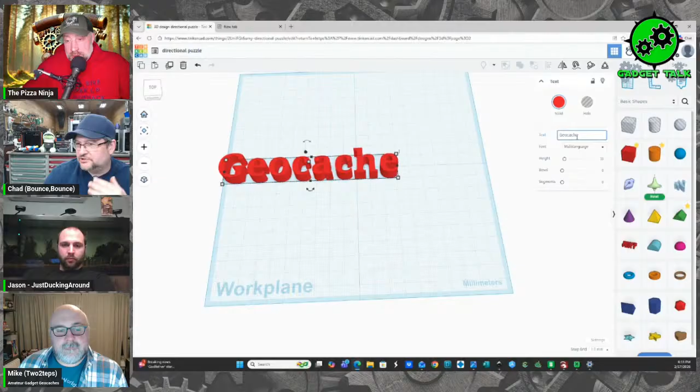One thing about Tinkercad: you have your basic shapes here. This is a solid shape, and this is a negative space shape. Then here are some other designs. If you want to add text, you can click on text and edit it right here, so you can add that to your design really easy.

I'll delete that. So right now up here it shows different basic shapes, and you can go to more advanced ones where there's actually creatures and everything, fun and games, electronics. If you go to electronics, there's different parts there that you can use.

They changed this up a little bit since I've used it last. These are the different Arduino boards or different boards to use, and there's also a sim lab. If you're trying to do an Arduino circuit, you can... oh wait, this isn't it. Is that still in the electronics one? You can add your boards and actually do... oh, you know what, that's on a different design up here.

And Tinkercad is fully web-based too, right? Yes it is. So you go up to circuits here on the top, and you can design circuits and actually test the circuits that way.

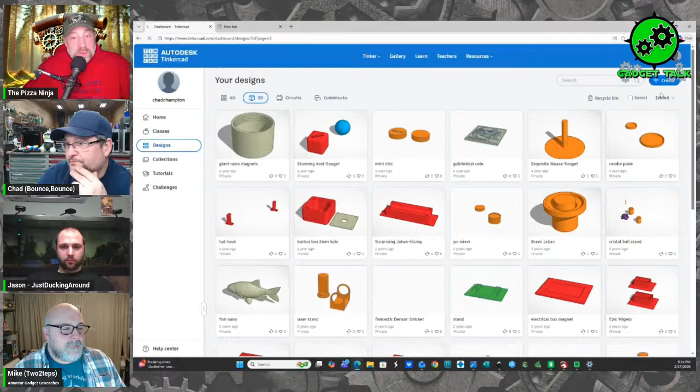I'll go back to my last thing I was working on. Actually, maybe I'll just open up a new design and start new. Really simple if you want to do a shape or a square box—here's your box, and we're talking about millimeters. Here you can adjust your size. So this right now is 60 by 60, and you can adjust this however you want.

And here is the height of it, so you can adjust this however you want to make a square. You can adjust the radius here if you want to, and the steps, the lengths, everything right here you can adjust. If you want to add a negative hole in it, you go to negative part. Now you can change this to a solid part here, or change this to a negative part as well if you want to.

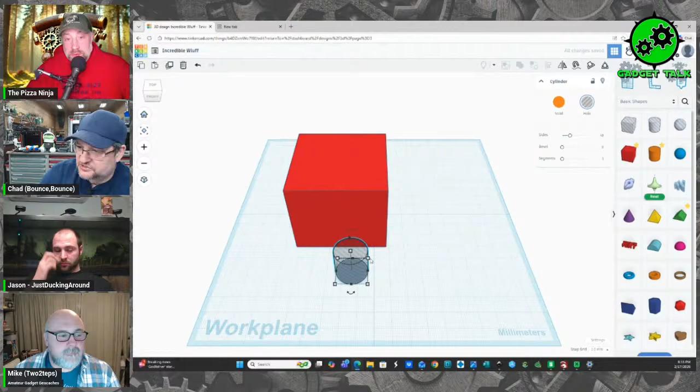But super simple—so when I make certain things, I'll do a negative part to fit in it, like the directional arrows. We'll do one here real quick to show you, and I'll try to be quick so we're not taking up too much time. This is 60 by 60, so I'm going to make this probably 50 by 50. If anybody has any questions, let me know.

Hopefully this is what we were hoping to explain a little bit.

As we're doing that, we got a few questions in the chat. One of them is from Chippy's Woodshop, who asked, do you usually design in metric? I always design in metric.

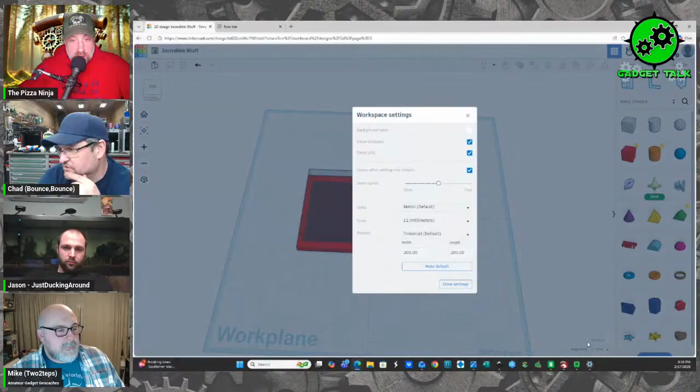I think Tinkercad actually has a setting too, where if you go into settings, you can change it from metric to imperial as well. Yeah, so if you go down to the bottom here, you can change from metric to imperial and to bricks, like Lego bricks type thing, or imperial, and you can also change it in settings. You see all these little squares here at the bottom—if I want to go over a little bit, oh, I got to click on it. I can adjust it over a tiny bit and it's going to go one square. You can actually change that all the way down to 0.1, and it barely moves if you're trying to move it, so you can adjust it that way.

So these two designs right now are the same height. If I put this inside here and group it together, it's going to show a negative space.

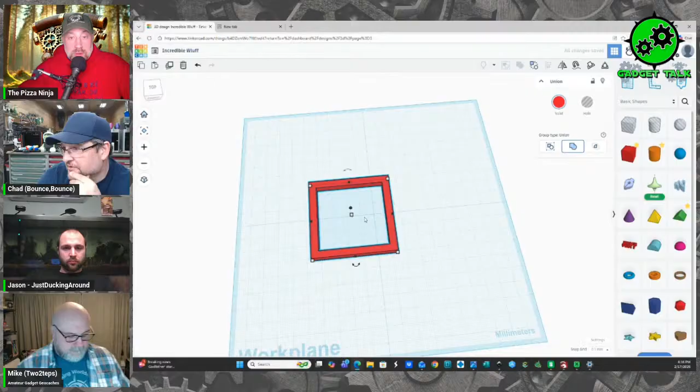But for my magic blocks or the directional arrow, I actually want a backing on this, a lower part. Let me ungroup it real quick. If you look at the arrow here on top, you can click on it and drag it up a little bit.

I'm going to just go to 1 millimeter. Right now this block here I have set for 5 millimeters thick, and this one here is sitting at 1 millimeter off the bottom, 2 millimeters and 3. So we're going to go 2 millimeters off the bottom.

If I want to center all this, we can go up here to the alignment area and align it center here and here, and it'll center it. Now if we group it, it gives you a bottom piece to it.

So that's how you can actually insert like a puzzle or anything into your shape.

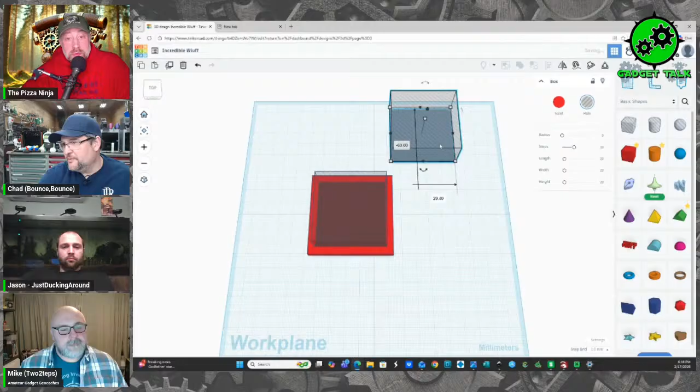I'm going to ungroup this real quick because I'm going to copy my negative space, since that's going to be my insert. Now I'll regroup this.

Again, I'm not a professional at this. I'm going to make this solid. Now this is going to fit inside here when I print it.

I actually am going to take it down a tiny bit in height or width, just because it's going to be so tight. It'll have a hard time fitting in, especially depending on your smash on your printer. If you have a little more smash than you need, it'll be harder to put it on there. So I'll go 49.5.

A lot of times when I'm doing this, I'll print it and it's a little too tight still, or a little too loose. So that'll be my space there. I'm going to make this 5 millimeters thick, and so this is going to be my block.

So on the directional arrows, I think I have a pair right back here.

Hey Chad, as you're doing that, we got a question from dsmavis: what is smash?

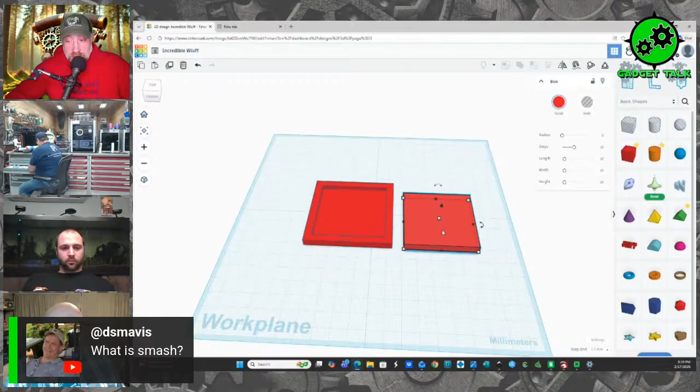Oh, that's a good question, that's a great question. So your 3D printer, when it's printing with your filament, the nozzle is going to push down on the bed, and instead of it being exactly round, especially for your first layer, it's actually going to smash a little bit to make it stick to the bed.

And if you have it smashed too much, it's going to actually have a little edge sticking out of it. Can one of you, maybe Jason or Mike, explain that a little bit better?

Yeah, so when you're 3D printing, it's almost like you're squeezing a piping bag of icing out. When you push that down, there's always going to be a little bit of squish in that plastic goo that comes out of the printer, so that can deform the bottom a little and give you not a true shape.

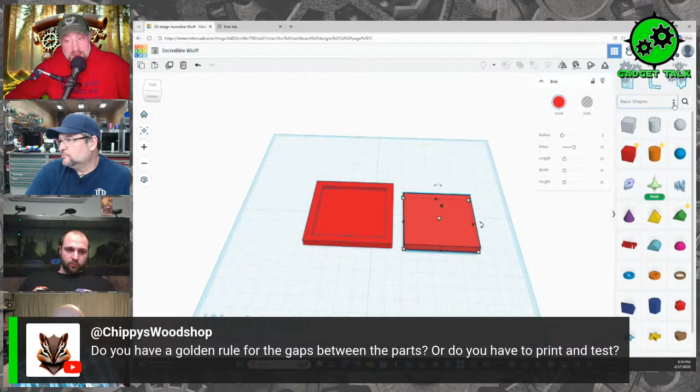You can also think of it kind of like making allowances for tolerance. Someone asked about a golden rule for gaps—I think a lot of times that plays into how precise your nozzle is. So if I have a 0.4 nozzle on my X1, I usually give myself about a 0.2 millimeter leeway for what I design versus what I'll get out of the printer.

But if I had a finer nozzle, I could dial that in even more, or if I had a crazy high-end printer, I could almost eliminate it. So there's always a little bit of tolerance you have to play with in your models versus what you have on the digital screen versus what comes out on your printer.

And you can overcome that smash by doing a fillet on the bottom too, and that kind of helps with your tolerancing as well.

So they've changed this Tinkercad up a little bit since I've used it last. Yeah, I was noticing like the other day when I was showing it to somebody, they've done a lot of updates recently. I think the software I use also just got an update. I opened it the other day to practice tonight's demonstration and I'm like, these are new menus. What did they do to me?

I haven't seen some of these. So I'm looking for the arrows, which used to be here. If you right click at the more shapes option, I can't remember if that's how it works, because in the menu you go down to the bottom too, and I can't remember if the arrows are in there. But if you select one of those options and go down to more shapes, do you see the button at the bottom? Oh, there we go, okay. It's interesting because I thought the same thing when I was checking it out last. I was like, where'd everything go? It's like, oh, you have to expand it with that more shapes or that more button to find more. Oh, thanks John.

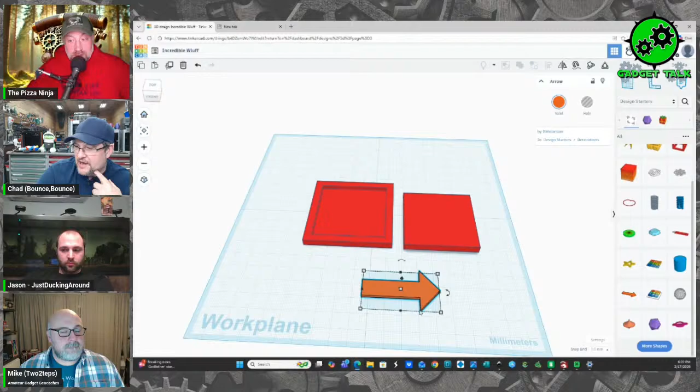So I didn't find the sample, I know I have it somewhere close to me. But this is the one where you get 5 different arrows and they only go in a certain direction. So the arrow I have is recessed into this block. Now again, this is only so thick, and I'm going to bring that up and make this a negative space on the arrow. Put one more, and then I'll make the arrow negative, because when I go to print it, I'll do it in a different color. I think I'll change the size of it to...

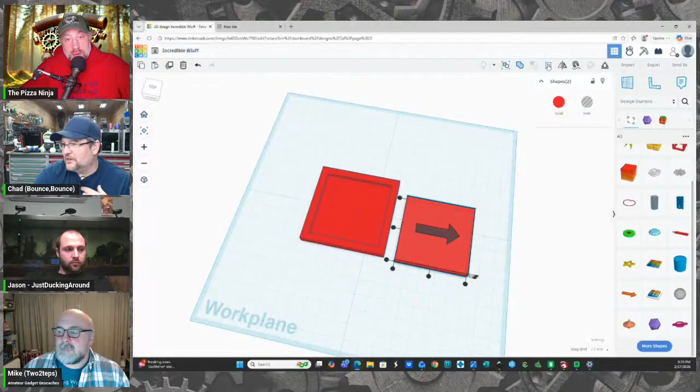Oops, that was the degree. So, there's other people who do this way faster and do it differently, but this is the way that I do it. So I'm teaching you my bad habits. And then again, I'm going to center all this here. I'm going to go up to the alignment tool, center it in the middle there and here. And then you can also center it, if you look this way, even with the top if you want to.

And then if you group it, you can... but you see how that brought up the block? So when I go to print it, it's going to be in the air. So I'm going to leave it down on the bottom. But I'm going to group this.

They've changed the grouping symbols too. Oh yeah, definitely the interface. I know Chrysler King was saying he uses it for some designs as well, and he thinks it's so much easier and smoother than it used to be. But yeah, it definitely takes some adjustments for sure.

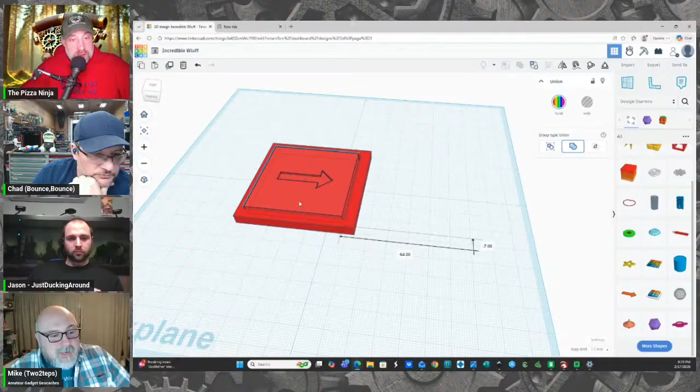I was gonna say, I think one thing with modeling too is anyone who tries this is gonna find that there's a lot of different ways to get the exact same outcome. So there's not necessarily a right or a wrong way. There are just better or more efficient ways, but the outcomes can still be the same, even if you took an entirely different road to get there.

Okay, now I'm learning here with everybody. So now let me see if I can find that here real quick. I know I have it fairly close.

Why do you guys like designing in millimeters compared to inches? For me, I think it's just a little more precise and easier to scale. If I want to go, oh how many centimeters is that, you add a 0, and it's easier to go up and down. You're using regular numbers, not fractions. I will admit, I use digital calipers, kind of like a poor man's conversion chart. So I'll measure an inch out, then hit the conversion and flip it to millimeters to get the conversion, or vice versa.

And I think for me, it's interesting because if I open Tinkercad, I don't know if it's like a graphic design type of feel, I'll go into the settings and set the work plane to be my build plate size. And for some reason, I always think in inches for that one. So I just find myself almost out of gut, changing it to imperial right away. Yeah, I do everything in inches, I've never considered doing it in millimeters. Fractions will kill me if I try and do it. But they're so ingrained in my head now that I just know them.

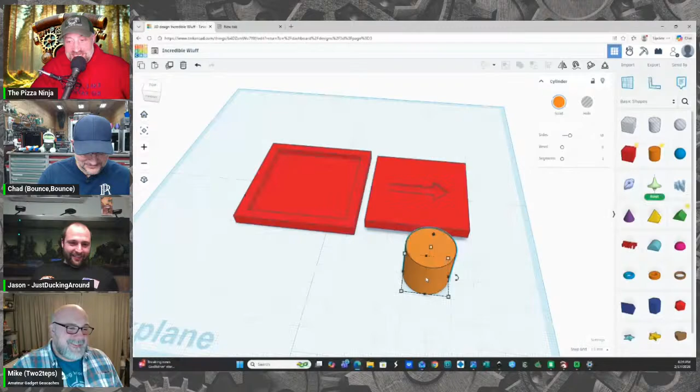That's great. So this is what they look like. I don't know if we can make my screen here bigger, John. So this is the design that I came up with, the arrow. If you look at the blocks here, there's several different blocks, but they don't all fit in the same spot.

Let me take down the arrow. So the arrows are in different directions, and the ears on them are different. Oh, that one's gone. If you look at the bottom, it matches. So you have to find the right arrow.

This is for a directional lock, by the way. You have to find the right direction of the arrow. So if you had like an ammo can insert, this is a pretty cool one to use. Seen this before, right? Love that one.

My plan was to actually integrate these squares into one of these for a cache. Then it would give your arrows the directions you need to go for your directional lock, and you just got to find it. We need to add those ears on here, and then they need to be adjusted several times for the lock so they don't fit evenly.

This is a little bit different, and I can show later. I don't want to take up everybody else's time. He did the directional one, but with the lengths, so you got everything the same height.

Oh, that's right, I got to share these on my Thingiverse or on Bambu's thing. Now that Mike mentioned that you actually get stuff for that, I'm like, well shoot. Get your free fill, I can get a new printer. It's about time. There you go. That would be sweet, it's been a couple months.

Anyway, I am going to add some ears to this. Let's see, how thick is this one? Five, I'm going to make this five.

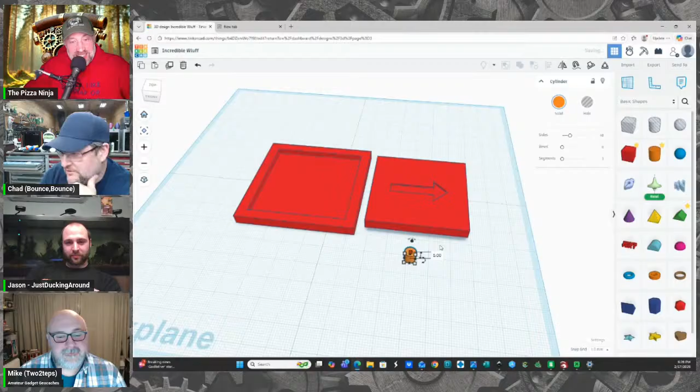And the way I'm going to do this is a little bit different. Oh, that's up in the air. There we go, I took it back down to zero if you didn't see that. Oops, and you don't have to use squares, you can use triangles.

Going to make a couple copies of it. So that's just Control C and V for copy and paste. I'm just going to add these around the arrows here, around this square in different places. Hopefully get them centered a little bit.

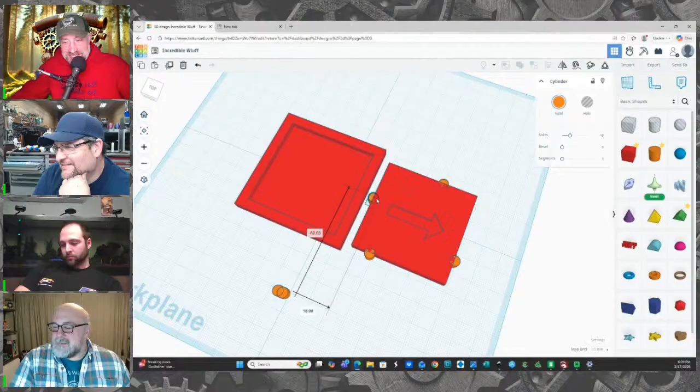In chat, Seaback Tribe says those arrows look very, very familiar, like I just saw them about a month or two ago. LOL. Yes, the other ones that I showed that Chad put out, I actually have in my Cache Odyssey Washington cache now.

If you could do this here, put it around this way. Let me move that real quick, and then you can group this, and then you'll just need to adjust every time.

I'm going to copy and paste that real quick, group it, and then make it a negative, and then center it in here. I need to go back up to my 50 though. Oh, it's 55 because of that. Let me change this, sorry, I need to make this the same size as that negative spot.

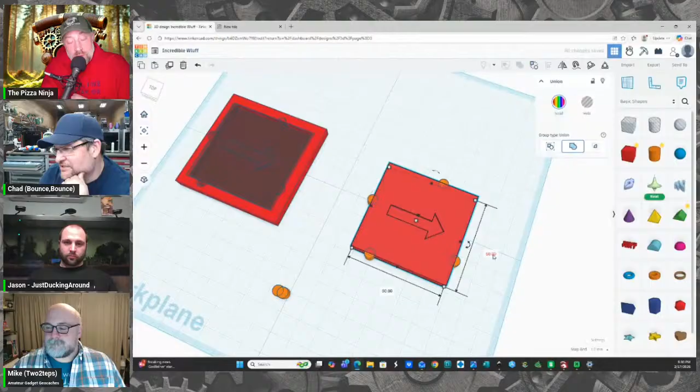This is why watching me, it takes me time. Well, so I mean, okay. I think this is great because it just walks people through that thought process, and a lot of it is experimentation, just sitting here and messing around. I mean, yeah, this is a good idea, at least for me.

So if I take this, put this in here, and I'm going to go up here to the alignment tool real quick, and I'll line it. And then I'm going to go ahead, I think this is on the bottom though. Yep, so if I look down underneath, I can see it sticking through. And I think I left 2 millimeters in between.

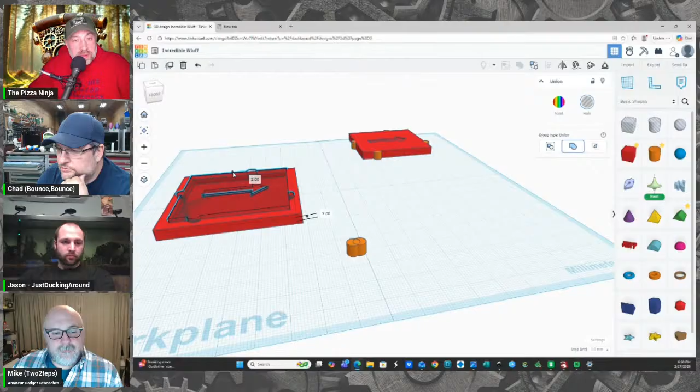So I'm going to go up 2 millimeters and make sure my alignment is still good, which they're grayed out, so they are. And if I group it, then that's going to give me the exact space for this to sit into. And then that's the bottom for number one.

I should have copied it without these arrows in it, but that's easy enough to change. I can ungroup it and move this. Whoops, just grab that middle part.

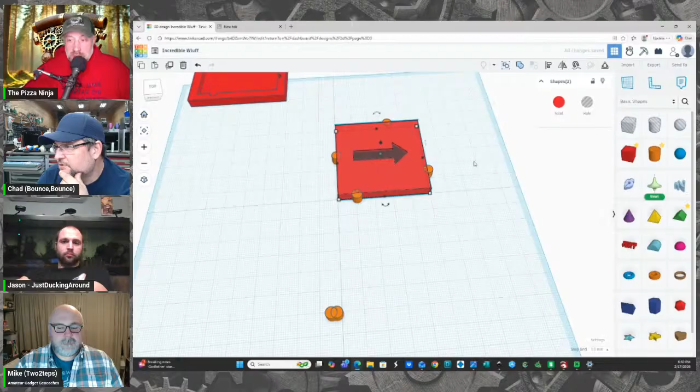I can take the arrow here and rotate it, so I can go 90 degrees if I want to. You don't have to do that, because whenever you put your little block down, unless you're making it negative space into this so I don't have to glue this plastic on there, you can just turn this to whatever direction you want it to be.

So if you do what I just did several times, export it as STL, then you could print it and that works, like that. Chad, do you want to walk people through the exporting on this one?

Because I mean, with Tinkercad it's just so friendly to do. Sure, so all you have to do is go up here to export, and then STL.

And then there it is right there, you can click on it. Oops, I'm on my screen. It might take a minute, I got a lot of windows open. But this will open up in the Bambu Studio.

And then you can make it whatever size you want. I was just messing around with whatever size this is on here, but you can change it. Instead of having half circles on there, you can do a triangle, you can do a square, you can do whatever you want with it. But the circles seem to work easiest for me.

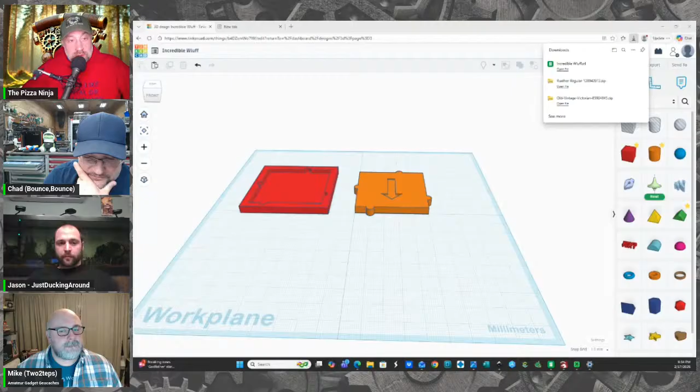So you just export as STL or save to your desktop as the STL, and then open it up. I think I got a bunch of windows open already for Bambu, that might take a while. But that's pretty much it.

Well, very cool. Hey Chad, we got a couple questions. So Chippy's Woodshop asks, is it possible to do parametric design in Tinkercad?

What's a parametric design? I did a little homework, I did not know this before, but parametric design is a design that is based off of set parameters. Tinkercad is a direct design with solid geometry, so it's taking shapes and putting those shapes together in different ways and sizes to build your final design, versus a parametric one, which would be drawing something in 2D and then extruding it and modifying that object using specific measurements based on the shape itself.

Like instead of just dropping a hole somewhere, you'd say okay, 2 millimeters from the left, 2 millimeters from the top, place a hole that's 1 millimeter wide in this spot. And then if you were to change any of those parameters, it would update the model to reflect that change. So, right, my crash course.

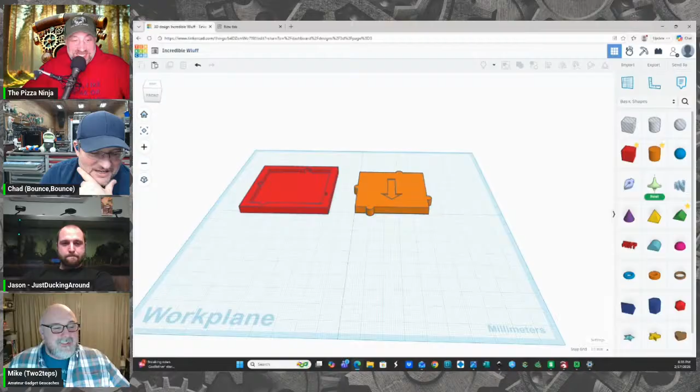That's why I wanted to meet this morning, that's what I wanted Mike and Jason on, because I think their programs are more tuned to doing that. Yeah, Mike can do Tinkercad. Yeah, and I think Tinkercad's a great way for people to get started.

And I know Chippy's Woodshop asked another question: can you design something complex in Tinkercad from scratch? Yeah, it depends on what you mean by complex. I've designed everything in Tinkercad that I do, but I guess it depends on how complex he's talking. I think it would be easier to do in one of the other programs.

That's something I think we're going to see as we look at my software and what Jason uses. The software gets more complex, but really it's just taking things that happen more frequently and making them a little easier. So I think you can absolutely do something complicated in Tinkercad. It just might take longer and take more patience from you than doing it in a more advanced software higher up the hierarchy.

Chad Bell on the Move says my daughter says Chad needs more 3D printers so that he has something to fill up his giant warehouse.

Chad, I have two sitting over in my pile over there. They're there in case, and I have two other ones upstairs. So how many are you up to in your shop? Not that many, I don't know how many I have back here. Five. Okay, nine. So I keep five behind me running, you can't see the very far end ones there. But then I have the Prusa XL, the Bambu H2D, two X1 Carbons, and a P2S. Then I have two Prusa MK3Ss, and then I have two, what's that brand I hate? Creality. It's a big format printer, I forget, but it's a piece of junk. Don't buy it, I don't want to advertise for them.

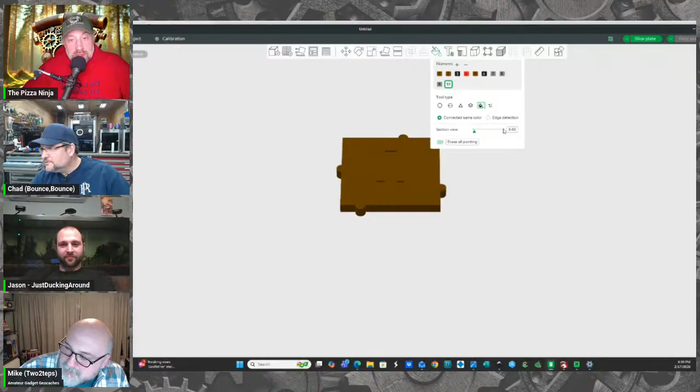Oh, see this has been updated too. Hit the edge detection on the right, below the paint bucket. Oh, there we go, sorry, thank you guys. Then I'm going to paint that arrow white. I don't know if I've ever had to click on that before, maybe I did last time. It caught me too. If you do fillets or anything in your model, it doesn't have edges, so it won't detect them. Oh, okay. So now that's white on there, and when I go to print that, it will print that arrow white or whatever color you want to use, so that it stands out. That's how I export it. If I save it to my desktop, then I can export it into the Prusa slicer if I want, or any other slicer. I have like four different slicers I use.

Chad, we got another question too from GeoFamAZ. Maybe I missed seeing the end product. Once you have the negative spaces in the lid, where would the arrow pieces be when the cache is first opened?

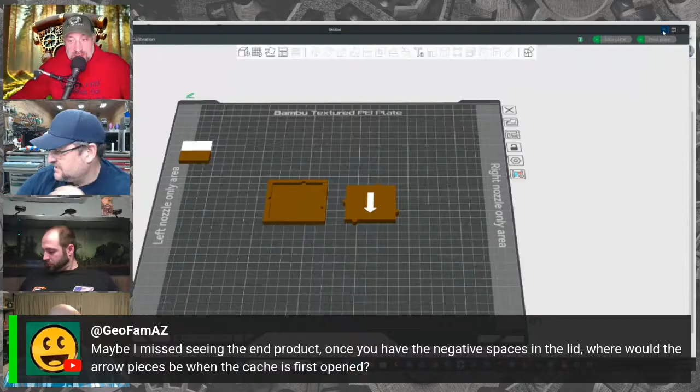I have them in a container that I 3D printed. It looks like this, it opens up, so it would be sitting on top. Now for something with an ammo can, I'm not sure where you'd end up putting them. You'd probably have to just do, you could probably just make one of these a lot smaller, depending on how deep it is, or you can just have them sitting on there loose if you want. But right now I just keep mine, because my cache is big, not in an ammo can, in a box like this that has the puzzle parts on it, and it has on there the puzzle pieces.

And that's how I keep them, but that's a good question. If you're putting it in an ammo can or a different container, you might just have them in a cheap plastic case like this, sitting on top. I'm not sure, put a magnet in it and then stick it on the top, in the negative space in the top of the lid. Oh, that's a good idea, put a magnet on the back. That's a great idea, yeah, there you go, that's easy enough to add the magnet to it too.

So, in fact, if we want to, I can show how to add the magnet real quick.

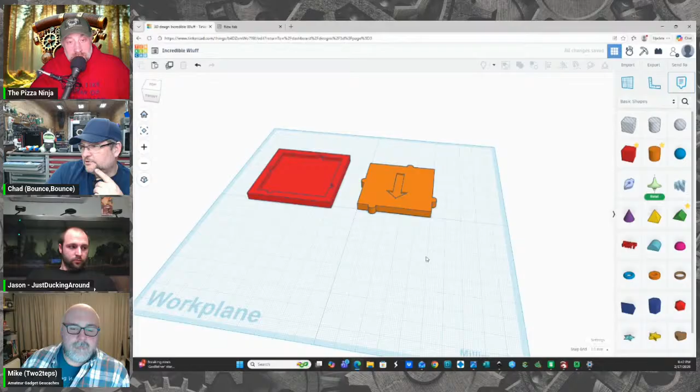And then if you flip it over, you have that little negative space right there for your magnet to fit into. I can show you how you put it in. This is super simple. This is how I make all my... I don't have that screen, my other camera on.

All you do is take your little 3mm magnet and pound it into that. So that hole would be less than 3mm technically, I think I'd do 2.9 millimeters, so it's a little bit thicker. So when you pound the magnet in, it holds it. You just flip it over, pound the magnet in, it will stay in there, and then you have your magnet to hook it to the top, to magnetize it to the top of the ammo can.

You can go really crazy and move your magnet to the corner or something, and then put reed switches on the bottom of the ammo can lid, so the magnet hits those and will undo a latch, and then you don't have to do any lock, you just have to put the puzzle pieces together. Pretty cool, that'd be fun. There's all kinds, that's what I like about doing these shows. That's actually a really good idea to do.

And if you want to make it harder, you can do a 2-piece arrow. I happen to have one right here. Sorry, I got to walk to the other end in my parts room.

It's okay, Chad. As you do that, I brought up your shop full screen so we can take a look at what's new in your shop. I don't know if there's anything new.

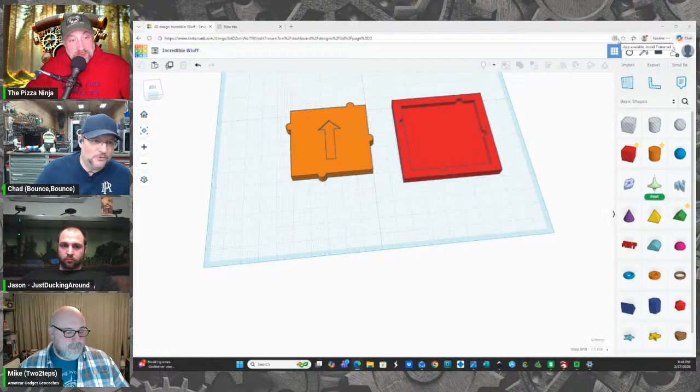Lightburn comes with a lot of different laser engravers and cutters. I know at work we have a Rabbit laser that uses it too. Lightburn isn't specifically for OMTech or anything, it's like Fusion 360, just a program for it.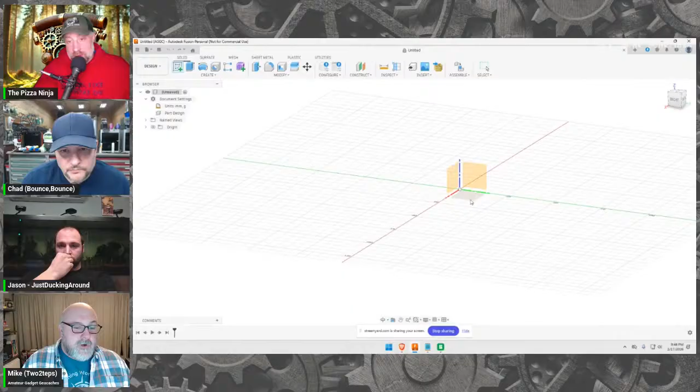So for our purposes, we're going to create a sketch. We can create a sketch standing up to the side, the back, or the front, but we want to draw it right on the ground. So I'll click on the ground plane here and start drawing. When I click on that, you'll notice the tools across the top changed.

We have some pretty simple, straightforward ones like drawing lines, and one here for drawing arcs and twists and turns, but we're going to keep it simple. We're going to get rid of all those and draw a circle. I'll go over here to the circle tool.

It kind of locks to the different grid points, so I'll lock it in the center, and then I can make it as big or as small as I want just by moving the mouse around. For our purposes, we're going to make it 100 millimeters. Type that in, press enter. And now I have a big blue circle floating in the void of space.

So we're done with the sketch for now, I'm going to hit finish sketch. And there we go, there's a blue circle. So what is that blue circle? That blue circle is step one of building this container.

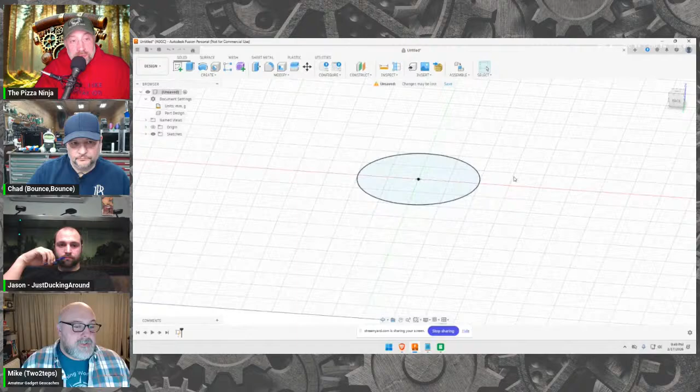So what we're going to do is, as opposed to pulling a cylinder in, I'm going to create a cylinder from this drawing. I'll go up top to where it says extrude, and that creates a little arrow on my circle. Now I can pull the circle up out of the ground or push it down into the ground and make that cylinder shape. We'll say 75 millimeters tall. And there's our first basic shape, from circle to cylinder in just a few steps.

This is now called a body. On the side here you'll see we have a side menu, there's bodies and body one. And if we go here to sketches, there's the sketch I used to draw it. So that's step one, that's the base of this cache container.

So what do we got to do now? Well, now we need to make a lid. I'm going to draw another sketch. Instead of drawing it on the ground or on one of these invisible left or right, X or Y planes, I'm going to put it right on top of the cylinder. I'm going to do what I did before, draw a 100 millimeter circle, but this time I'm also going to draw a 90 millimeter circle.

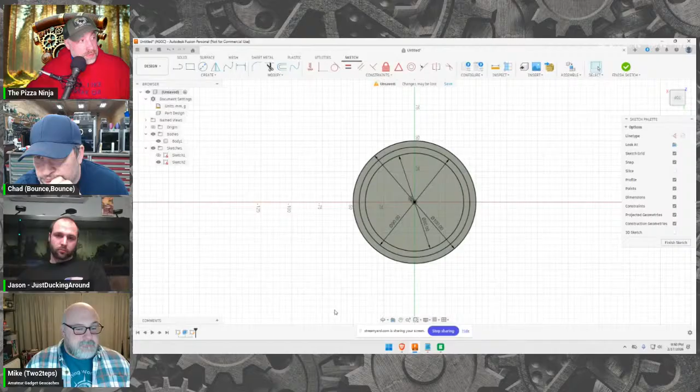I'm also going to draw an 80 millimeter circle. So now we have this bullseye on top of our cylinder, more shapes we're going to pull out of this. We have little measurements here to let us see how big each one is. And we're done with this sketch for now, so I'm going to hit Finish Sketch.

This time I'm going to extrude again, using that sketch to make a new shape. I'll go back up to the extrude tool and click on the inner circle, the middle circle, and the outer circle, and they all join together. Then I have my arrow back, and I can drag it up into the air.

I'm going to draw it up to 50 millimeters this time. Now you'll see I have the option to join it - the option says Operation Join. What that'll do is just make the cylinder bigger, so it took the 75 and added 50 more on top. I don't want to do that.

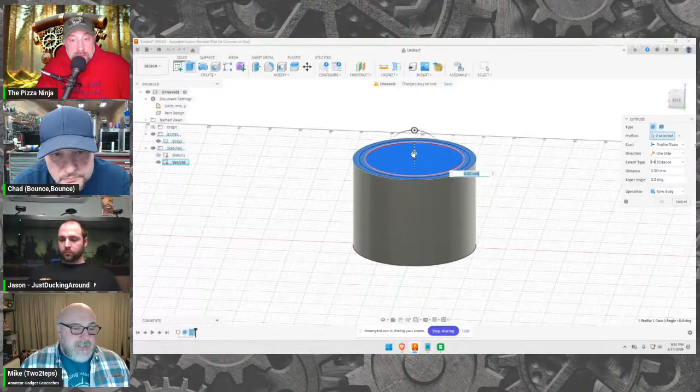So I'm going to go back and do that again - 1, 2, 3, 50 up in the air. And I want to go over here and hit New Body. There are some other options there I'll talk about in a second, but I'm going to go to New Body and hit OK. Now I have Body 1 and Body 2.

I also have Sketch 1 and Sketch 2, so it's a little vague. I'm going to rename this one and call it Base, and rename this one and call it Top, because that's the top of this container, right? Then we'll do the same for the sketches to keep them straight - this is the sketch I used to make the base, and this is the sketch I used to make the top.

So now I have this shape here - I have a top and a bottom, not much else to it, just two cylinders sitting on top of each other, like a couple of soda cans. Now I want to do more. One of the nice things is I can turn off these shapes if I don't want to see them.

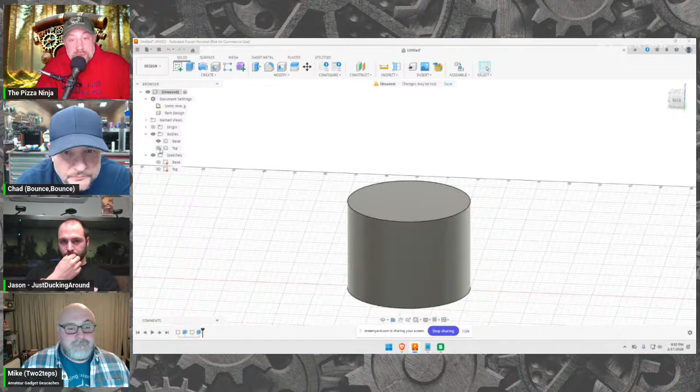I'm going to turn off looking at the top for now - now it's invisible, I can't see it. Then I'm going to click over to Top and bring that sketch back, and I'm going to put a hole in the side of this, because we're trying to make a container, and a container needs an open space to store things. This is an example of how you can do the same thing a couple different ways.

In Fusion 360, there's actually this really cool tool up here called Shell. If I click on that, click on my shape and type 10, it hollows the entire center of that shape out in one click. Now I have a 10 millimeter thick wall all around and a 10 millimeter thick floor on the bottom, just with 2 clicks.

So I'm going to actually not do it the easy way - I'm going to do it a little more complicated because I have an extra step I want to stick in there. Instead I can go back to that sketch, back to my handy extrude tool - it's all about pulling holes or cutting things. If I pull this down, you see it turns red, and I'm actually cutting into the shape. So here I'm making a bigger shape, and once I hit that 0 part, now I'm cutting down into it like a drill bit.

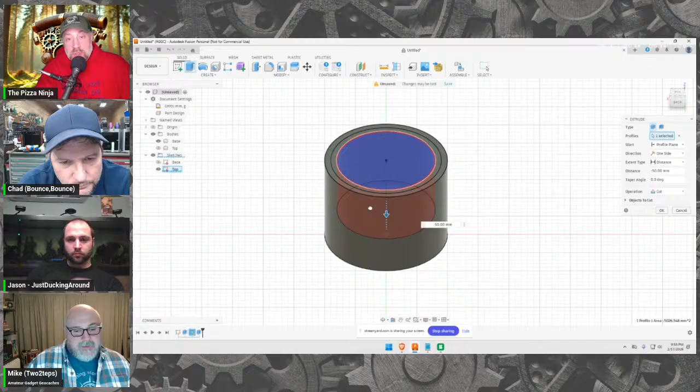So I'm going to drag that all the way down to 70. Now I've accomplished the same thing I just did with that shell command, with a couple extra clicks - same end result, different method to get there. I'm also going to take this inner circle here and drag this one up 20. What I've just done is made this - there's the bottom, there's that lip, there's the hole inside. So I've gotten far enough to make this shape right here.

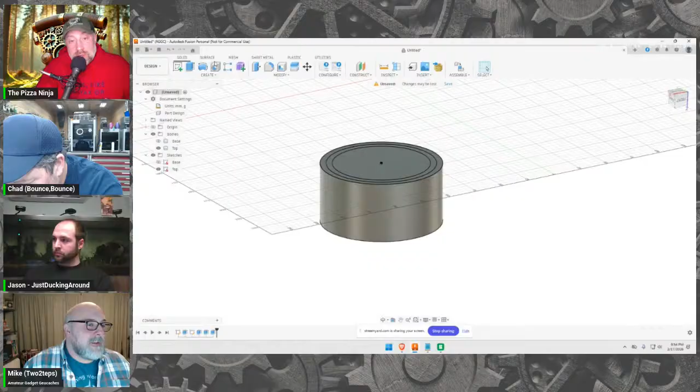But the problem is I've got to make this lid fit, so I've got to do the same kind of operation on the top of that lid. So I'll flip this to turn off the bottom part and turn on the top part. I'm going to do kind of the same thing, but in reverse here, so I'm going to go again to extrude.

I'm going to pull that down 30, 35, 30, and then make space in the lid here. I made the lip on the other one 20 tall, so I want to cut this one to 20, but as Chad pointed out, I need a little margin of error. So instead of pulling to 20, I'm going to pull it to 20.25, making that inside cut on the lid a little taller than the lip on the actual base.

So there we go, I have now successfully built that much of this container.

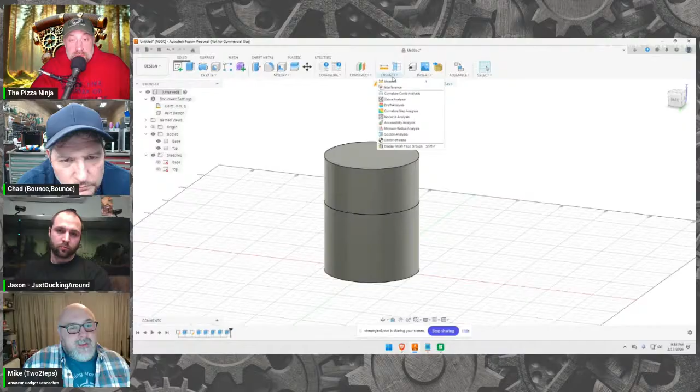Now it gets a little complicated. How do I see what's going on in here? There's a cool function for this - under the Inspect menu there's Section Analysis, which lets me cross-cut this model, cutting top to bottom, left to right, or front to back. Since it's a cylinder, we'll do front to back since it doesn't really matter, and now I can see a cross-section of that lid.

So I can actually see that seam with that itty-bitty 0.25 millimeter gap there, as well as the line where the top meets the bottom and the bottom meets the top. That's what's going on inside, kind of behind the scenes where you couldn't see it before.

So we got this, and we want to get to this - so what are the next steps? I want to put threads on this, I want it to screw together so it stays shut and you can keep things inside of it out in the wild. I'm going to turn off the top again so I can get a better view of what's going on.

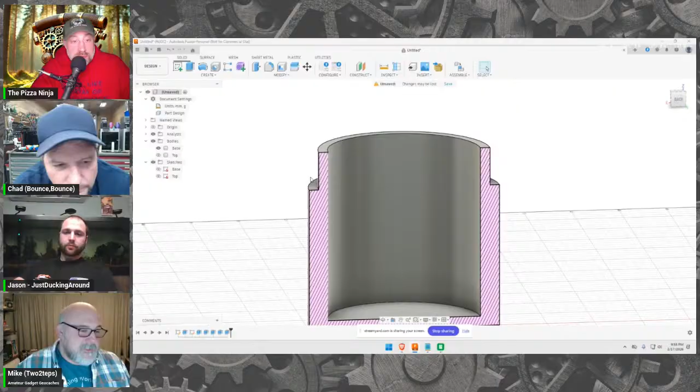I'm going to go over here and create a thread. There's a tool for that - click on it, click where I want it, tell it to model it, which makes it reality as opposed to a mark, say remember size, and boom, there it is. There's a thread, cut right into the lid. No complex modeling, nothing overly difficult to make that thread happen.

And I can do the same thing with the top. I'll turn the base off, turn the top back on, and do the same exact step.

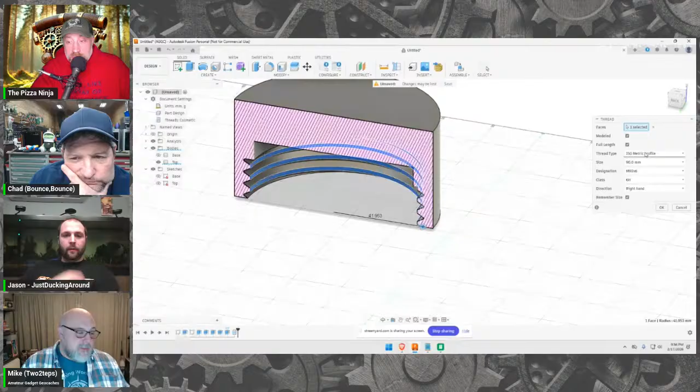The cool thing here is there are a bunch of settings over here. I'm not messing with them right now for this tutorial, but you can actually change these settings and make that thread the right pitch or size to screw into almost any common thread port. So if you wanted it to screw into an existing hole that has threading, and you know what that threading is, you could mess with these drop downs and make the thread on your 3D print fit right into another real world object with very little fuss.

So I'll hit OK again, and now when we look at our cross section, we can see it - threads that are perfectly lined up without having to do any complex modeling or overthinking. But we do want to add in a little bit of tolerance because, again, with 3D printing, what we see on the screen isn't necessarily what we're going to get out of the printer every time.

So I'm going to add a little bit of play to these. I'll turn off the top again and use a tool called Press Pull, which is similar to extrude but has some slight differences and is better for this application. Click on the top, click on the bottom, click on the side, and shrink it by 0.15 millimeters. I'll do the same thing on the top - Press Pull, top, bottom, side, minus 0.15.

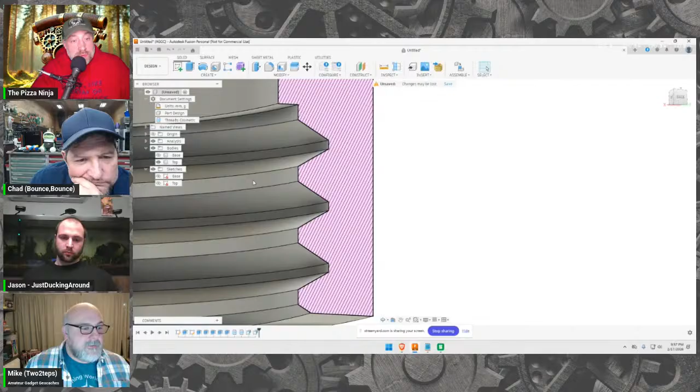Now if I turn on both of these, the same thread is still there, still lined up, but there's a little bit more play in it. That's going to make this move a lot smoother, so you can spin it freely without having to wrench it on or off, or worry about it being so tight that it gets stuck through usage. There's enough play in this lid that it's never going to get bound up just from being closed. So, getting close to the end.

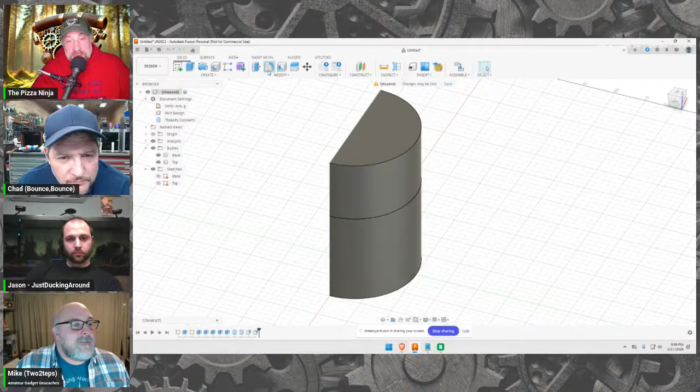So there's our screw top container. It's still a little square, though. It doesn't have that nice, smooth, sleek, aerodynamic Art Deco look. And that's where fillets come in - that's this tool up here, fillet. So if I click right here on that lip, I get a little arrow, and just like everything else, I can pull that arrow in and add a nice smooth curve to the top of it. It just makes it a little bit more sleek.

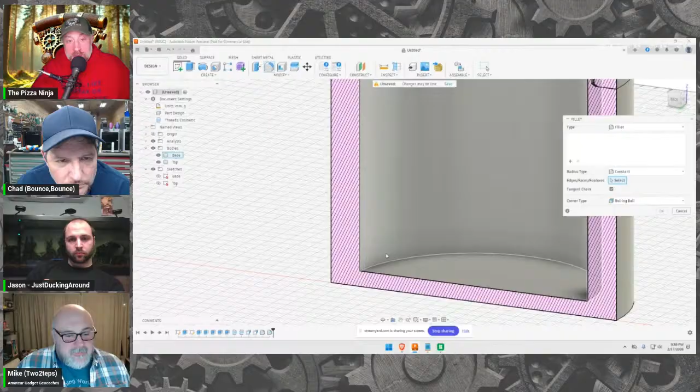So we're going to do a 30 millimeter curve on that. Now it's pretty much what I have here in my hand, but not quite. A few other little housekeeping details I like to do - I like to add that same kind of curve on the inside here. Just a little one, we'll call it 7.5. And I'll do the same thing down here, we'll do a 5. And we'll do one on the outside here, a 2.5 out here.

And what that's doing is just smoothing the edges out. So instead of having to sand it or worry about a sharp edge, or what Jason was talking about earlier, if you add a fillet to the edge it'll give you a nice clean finish and kind of compensate for some of that squish. So there you go. So now we have a screw top container, kind of an oversized nano container, ready to go. I could export this right now and hold it in my hand.

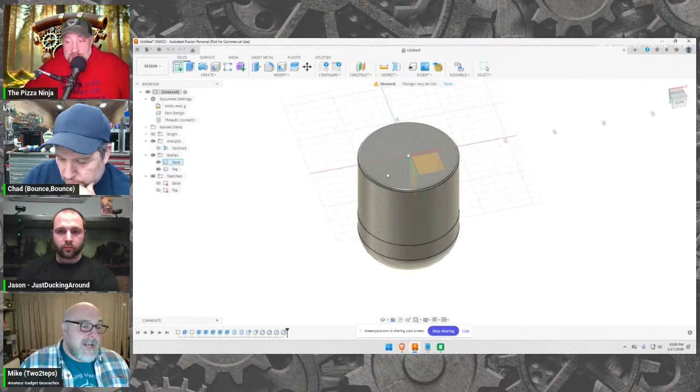But I'm going to do one final thing. I want to put some text on it. I actually have text on the bottom of this container, so I'm going to flip it upside down. I'm going to go back and we're going to sketch. So I'm going to click on sketch - I want to sketch on the bottom of this, so I'm going to click on the bottom. And then I want to center it on here.

And I can go back up to create text. I can kind of trace right over top of that box. Now I can do 'official geocache, www.' And I want to center that, center it top to bottom, and it's obviously too big. So let's drop this down to 6 millimeters - about 6.5, there we go.

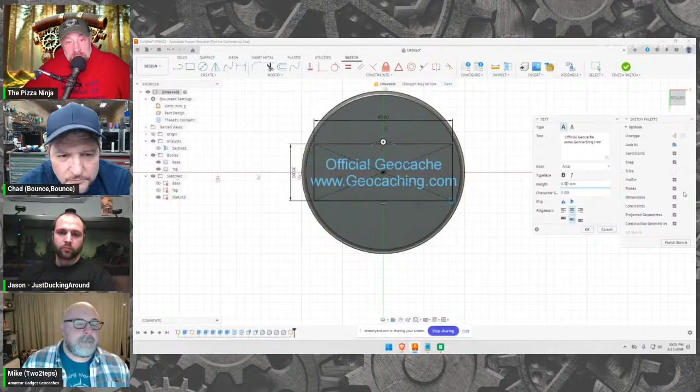Now I've written 'official geocache, www.geocaching.com' on the bottom. And just like everything else, I can use the handy extrude tool. I can click on that text and I could make it jump out at you like a terrible 3D movie, or I could zero it out and just make it a slight little quarter millimeter engrave on the bottom. And that could be any kind of text you want.

That could be that generic official geocache, it could be the GC code, it could be your name, it could be even just a blank spot where you could put a P-Touch label. But if you engrave it onto the cache like that, there's guaranteed no one's going to wash that label off, rub it off, or get rid of it by mistake if they find it in the field. So you've kind of branded your cache forever with it.

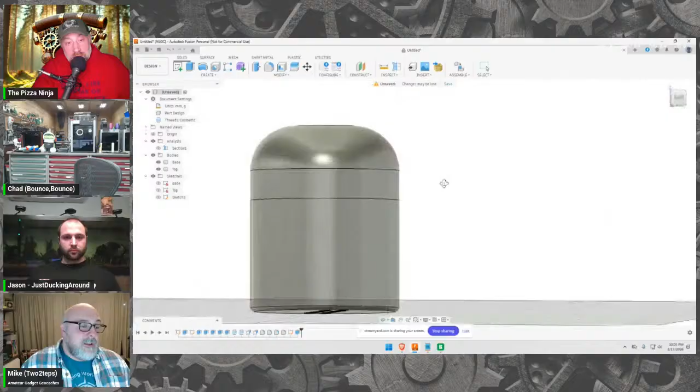But that's it - that is all the steps to take to make a container like this that'll work fine outside. One thing you might have noticed is the threads point up from the bottom, so when the lid's on and it's sitting like this, water is going to go down. It's not going to make a right turn and go back up under the lid. So you get a fairly waterproof container as well.

You can even go to a hardware store and find a little O-ring you can squish in there too if you want to get it extra tight. You can probably print a TPU O-ring if you want. Actually, I have right here - there's a grouping of TPU O-rings I've printed for another container I've made for the Cachecraft crew.

That's cool. Hey, Mike, Chippy's Woodshop has a question.

What's the smallest text size your printer can handle? It depends - so I took that same container and I shrank it by 50%, and it did not handle that text very well. So it's fine right there, but it did not have a good time when I shrank it down. The container still works, but the text got lost.

Probably about 5 millimeters is as small as I would go on my printer before I start to lose fidelity, and some of the I's and T's don't get crossed as well.

Could you show us how to create an STL file in this software? Absolutely. So let me export the base here. I'll turn off the top, go up to File, Export, and pick the file type. I can do an STL, or a 3MF, which is something the Bambu printers like. Let's call this base and drop it to my desktop. Export. Then I can go into Bambu Studio and import it. There it is.

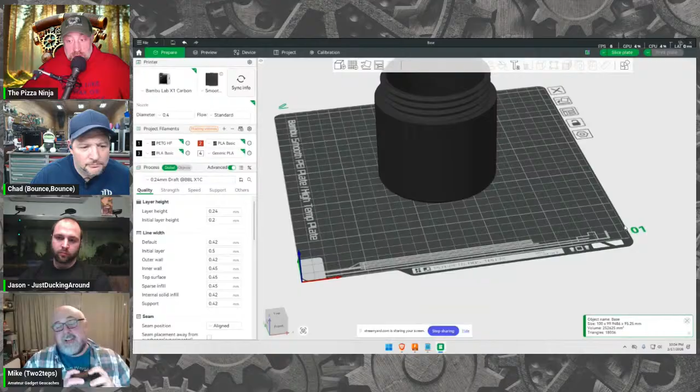Ready to go, ready to be printed. It's so cool, I think we've all said this once. It's so cool to be able to draw something on the computer, hit print, and then hold it in your hand and have it physically there in the world, uniquely yours or customized to be exactly what you need.

Very cool. Mike, you got a lot of good feedback in here too. DSK11 said, you guys make it look so easy, it would take me a month of Sundays to figure that out, LOL. And GeoFam AZ says, okay that does it, I'm making time to learn Fusion.

Chippy Woodshop says Fusion can send directly into the Bambu Slicer as well, if you go to utilities and make it. I've never tried that, oh look at that, I'll have to mess with that. Yeah, that's a very cool tip to have.

Cool, so that's Fusion 360. I would call that kind of the middle tier, so it's maybe a step above Fusion 360... a step below, or several steps below, what Jason's going to show us, which is a really cool, powerful software.

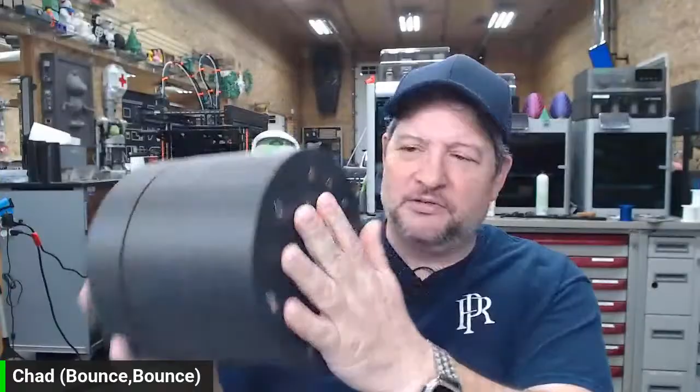One thing to bring up real quick, since you did a Nano, I have a Nano here as well, and I just added a bunch of magnets to it to make it magnetic. Same thing, the holes are smaller than the magnet, and I pound them in there and they don't come out. Anyways, that's one way to make your magnetic Nano.

Absolutely. So I'll go next. My program is Autodesk Inventor, basically the big brother of Fusion. This is a full CAD program on my laptop, not like Tinkercad, it's not online, so you need a computer that can handle the graphics and all of that.

I'll try to touch on some things that are different than Fusion, but basically everything Mike showed you, you can do here, so it's a more robust solution. I like it for assemblies a lot, which I'll touch on as well. But it also comes with a much steeper learning curve. It's not like Fusion where you can just drag objects, like Mike was doing, to get a fillet bigger or smaller. I actually have to dimension every single part of it.

So this is the main screen for a brand new part. I'll make Chad's model really quick just for fun, so we can keep it consistent. Same exact thing that Mike was saying, you got to do a sketch, but unlike the whole grid pattern that both of them had, I just have 3 planes, so it doesn't matter which one I pick. But same exact thing, you have to sketch every single thing out.

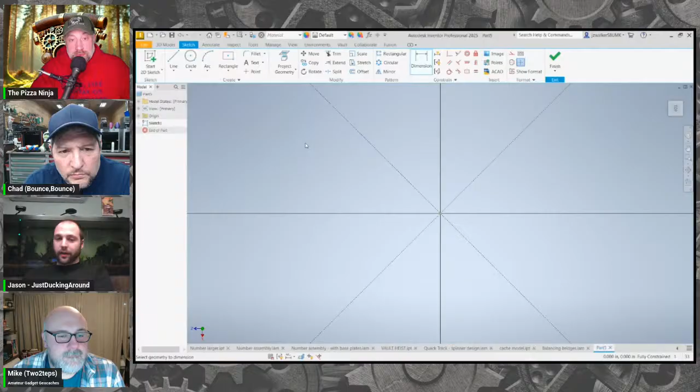Then Fusion, I believe, Mike, you have this, you just didn't show it, you have all these different constraint attributes you can use. So like this one is the equal sign, so I can make these two sides of the square equal. Right now the color is purple. As soon as I add in a dimension, I can make this a 4-inch puzzle—I do everything in inches, so it's going to be a little different. Now those purple lines turn black because they're fully constrained. So that one equal sign and that one dimension made a 4x4 square.

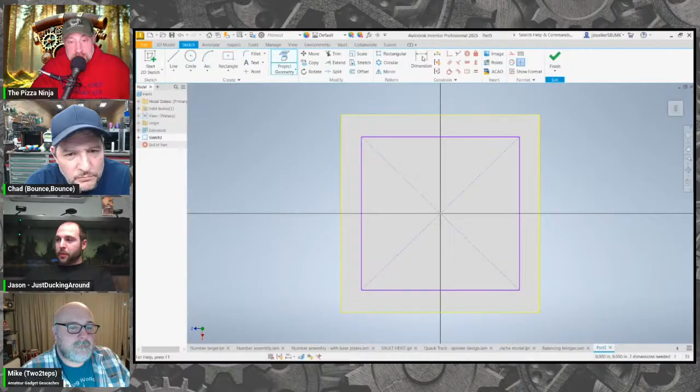So then I come here, and you got to do the next part where you basically bring that 2D sketch into the 3D model. We'll do 0.25, and just like Mike was doing, you start adding sketches onto the object. One cool thing about this, I can actually project geometry from previous objects. So if I ever change that 4-inch dimension, that yellow line is going to change with it. If I now dimension off of that yellow line, everything in that model will change after that. So I can do the same exact thing we did before.

And now I'll start extruding this. This is the negative space Chad was talking about, but I actually have to model it in there. So now we have that square that he had earlier. It's just a little different—you're making it, you're not adding the shapes like he was doing.

And now to get that center section, I can project this object, and there's a ton of modify features, different features. So I can actually come here and offset that sketch. I don't have to do anything else—this is where I can add my tolerance in right in the sketch.

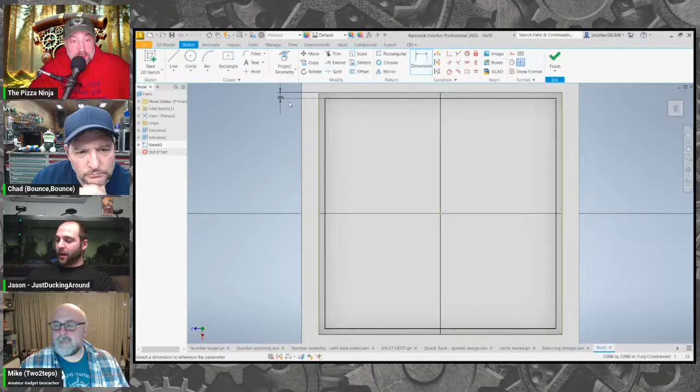So for inches, I typically, for 3D printing, like to do 0.02 as my tolerance. That seems like a good tolerance for my printer, and then I can print from there.

So one thing in the extrusion part of this, I can go by dimensions like everyone else was doing, or you can actually go to surfaces—like this button here. I can select a different surface, so no matter how I change that surface in the future, this new extrusion will always go to that surface.

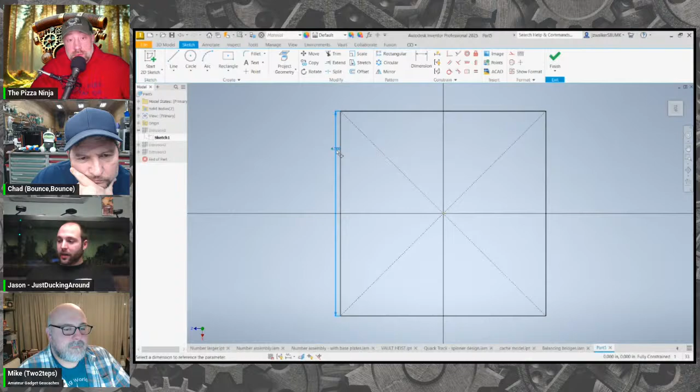I can make this a new part. Like Mike was saying, there's the tree on the side—mine's a little different than his, but like I was saying, this 4-inch circle we made in our first sketch, if I now bring this to 3 inches, all the rest of those things will automatically change, update, and populate immediately.

I do not have the ability to just drop in an arrow or something, so I'd actually have to draw this out really quick. You're just doing lines, rectangles, circles—same exact thing. And we can start constraining those actual objects in there to get everything to look right.

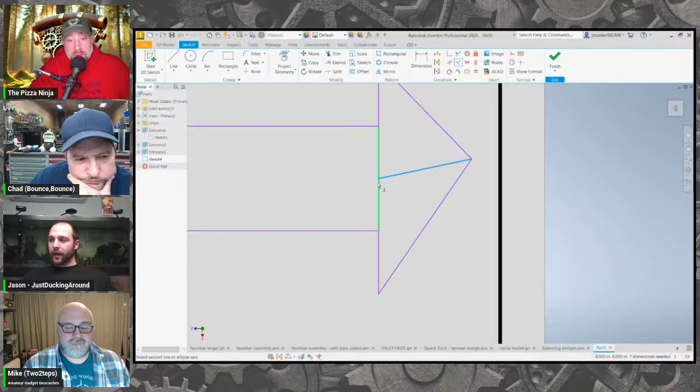So I can start dimensioning things. That green arrow, or that green dot in the center right there, is actually the center point of that line. So I can put this line on that center point and then start picking some of these other constraints, like this perpendicular one, and that line will automatically snap to 90 degrees right there. I don't need to dimension this so it's perfect, but...

We get the point—so we can go straight out like everyone else was saying, or we can go in. Same exact thing that everyone else was showing, but I think the part that delineates this kind of software is the ability to build a full mechanical assembly, something that moves. You can, so we'll start getting into that.

So I made this model a while ago. It's a mechanical little number block puzzle, so all the parts move in there.

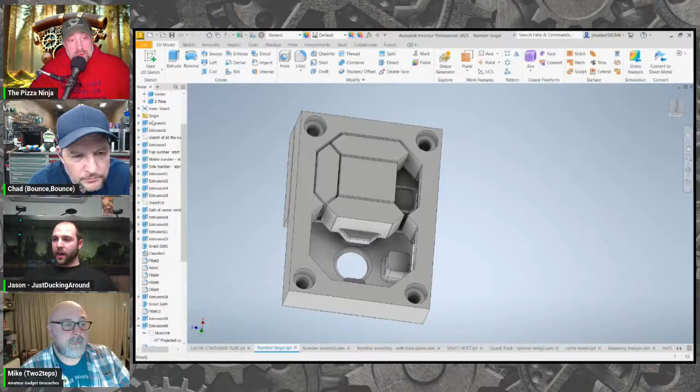So this model itself is 6 different parts that I have modeled in here. The tree here of all the different commands and things I did is not that big compared to some of the other models I can show after this, but every single part here builds all of these parts.

I can start toggling them on and off. So this is the outer surface, and we get into these inner pieces that move. Then I'll get into the assembly portion.

So my design—the way I typically do it is I like to design all of these pieces in one file. It makes it easy for me to change dimensions. If I change this dimension, these other parts will change, instead of having multiple different files going along. But then I have to separate them out afterwards.

So I have to come here and make a part, or make a component here, to show what is going on, or to separate it from this single part file to make an assembly. So I can come here, and now this is every single one of those parts broken out into its own file. Then I can start hiding a couple—and this green part is the part that actually moves.

So if I move that, you get the number 2 that comes up. I can start playing around in the design software and see how all of these different components interact with each other. Are my tolerances going to work? Is all of this good enough to actually build into something?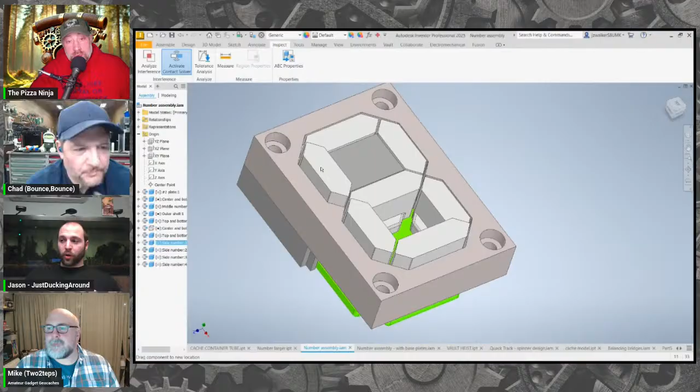I can activate contact solver, which is on right now, which means these parts, once they hit each other, can't move any farther. So I can see how much motion I get in different parts. Like this part right here, when it's fully up...

Are you seeing my measure screen on there? Yeah, you can see it, it's giving you a little blue dimension, that's right - just under 0.2 inches. So I can start analyzing how all of these assemblies actually work together before I even get to the printing stage, which drastically reduces my build time of an actual gadget cache. I'm able to iterate really quickly now, and see how different parts interact with each other.

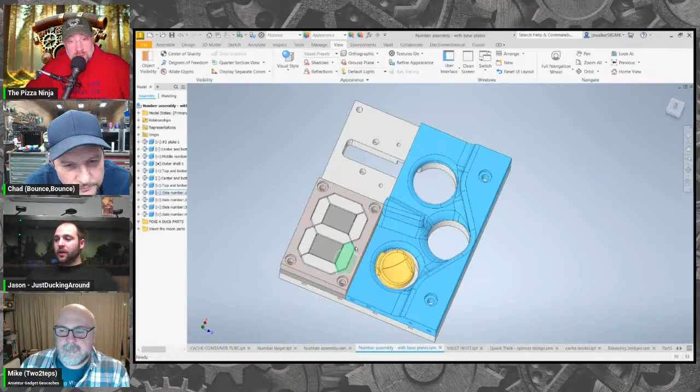So this is one piece of a cache that I have. It is Shoot the Moon, the old kids game with two metal rods you move back and forth, and a metal ball that rolls uphill. This cache is designed so that metal ball will hit this yellow lever, and then it will push up a code. I'm able to design all of this, see all the tolerances, see how that lever moves in relation to that number block. This more robust CAD software enables that ability to do that kind of design.

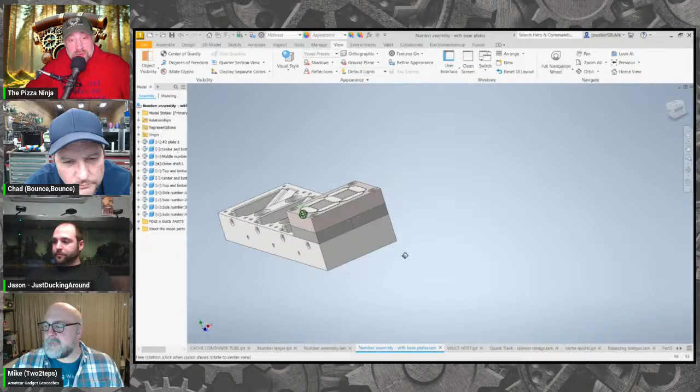Now I use the same number block in a different cache I have. Fusion 360 had a different way of doing it, but I can section the views as well, and start seeing inside of the parts. So this is all the components inside. If I select there, I can see how this red part moves the green part, which moves the numbers up. It gives me a very good idea before I ever get to an actual build phase of how this is actually going to work.

And half the time, even then, I still make mistakes. It happens. But it gives you a more robust ability to design parts that are very complicated, more complex.

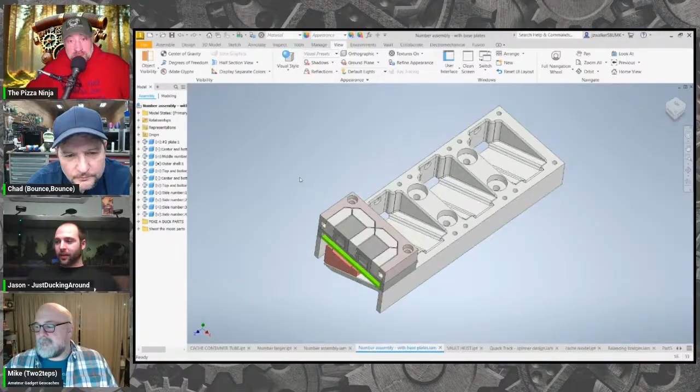The secondhand cache episode we did in November or October - these are tractor gears out of a transmission that I took, measured, modeled, and then made all of these parts off of that. This is one model that has 18 different parts that create this kind of cache. It really enables you to build these massive models with parts and parts, and this is how many steps I made to make this model.

I'm up to 111 extrusions, and that's not fillets, that's not anything else. These parts can get very big. I can see how they all relate to each other all at once in the same place before I ever start making anything.

And the cool part too, Jason, is you can go back to the beginning and change a value and have that change cascade out down the timeline. Yeah, so you have to be very careful with how you make the parts in the beginning.

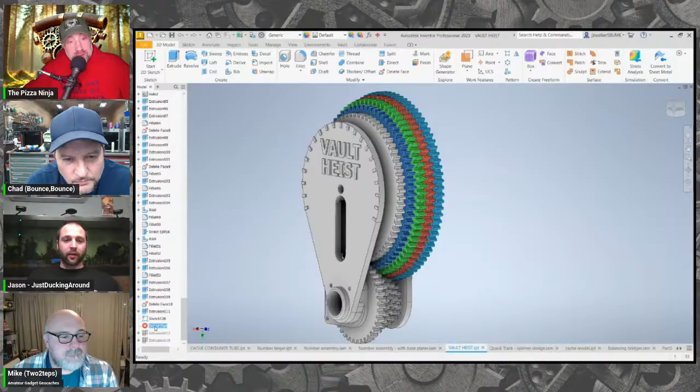One thing I like to do, so if we go back here - there is an ability to set parameters. Hold on, let me stop sharing for a second.

Hey Jason, as you're looking through that, we did get a few questions. Chippy's Woodshop asked, does Inventor have a free version? I don't believe so.

All 3D modeling softwares like this are basically the same. I would direct you to SolidWorks for Makers - that's $48 for a license for an entire year. It's the same exact thing, the buttons are just going to be in different places. It's just as robust, just as easy. It's made for hobbyists, actually.

So I have my screen back up so you can see the other window - I was only sharing one screen. I can actually come here and set parameters. I can add a parameter and say outside, and then say 3 inches. If I come back to this first part, I can then - oh, I'm in the wrong model.

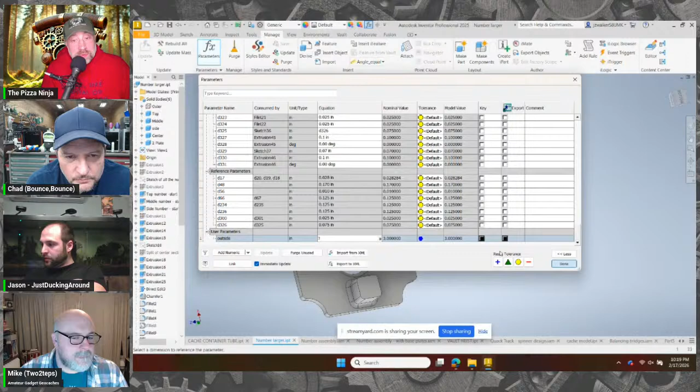Doing the same thing over again. I can come all the way back up to this extrusion, this first extrusion, which is the sketch, it's 2.75. If I make this now, I gotta get it exactly. That will automatically update to 3.

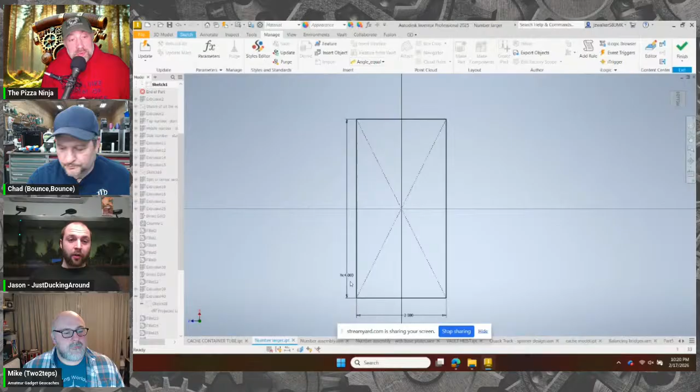Now, if I come back to this parameter, make that 4, that sketch will automatically update to 4. So what Mike was saying, how I can go all the way back up to the sketch and change that dimension, it really depends on how you build your model, how you build your sketches. So if I did this, I do not know how the rest of this model will react. Some part could break. It depends on how I modeled it.

It's going well so far, but it could, like if something was dimensioned, see something failed. So this extrusion here was 2 holes that were in the back for screw points. So me changing that dimension messed up something in that model, which failed.

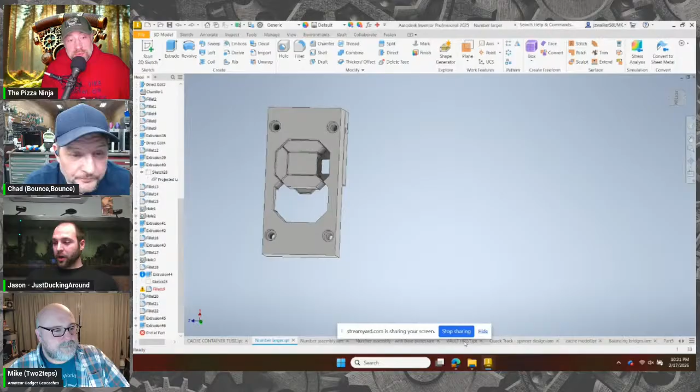But you just have to be careful with changing too much stuff, especially when I get into these bigger models. This one, I mean, I have to be careful because I'm 111 steps in. If I change the first one and do something wrong, it will mess up 111 things. But it's just a more robust way to build bigger, more complex models.

Absolutely. It's super powerful, and it truly is like the bigger brother to Fusion 360 or Tinkercad. It can do so much more in depth. If Fusion 360 or Tinkercad would make the bolts, this is the software that could model those bolts into a machine or a series of gears using a tractor crankcase.

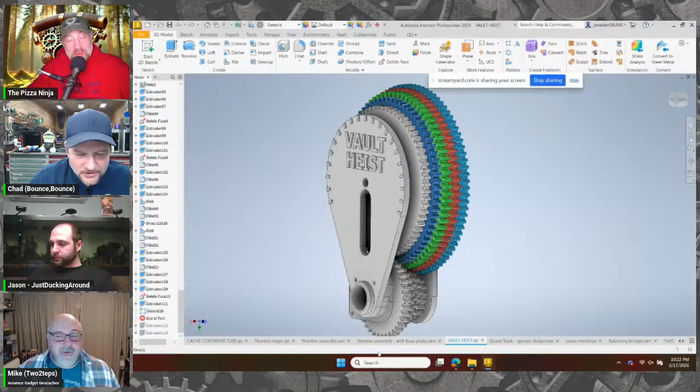So can Fusion 360 also animate the part? It can, not nearly as robustly as the Inventor software can. I have a few models with some very basic motion put on mine just to see how they would work. But to my knowledge, there isn't a way to make it tell me, oh, that's colliding with this, or it's not going to work the way you think it is.

It's more, this piece goes up, this piece goes down, this piece goes in, this piece goes out. Now, I could be speaking out of turn. There might be a way to do it, but it's not as robust as it is in the Inventor software. Yeah, that's pretty impressive that you can do that. See how it works. Absolutely.

You know, when you're doing the build, so if you're looking at Tinkercad, I'm printing that, and then I'm finding out, oh, it doesn't work. Now I got to change this. So you can spend so much time printing things, and then, oh, I got to remeasure this or redo this and this. It takes a lot longer without that animation. Yeah, that's pretty impressive. That's pretty cool.

Absolutely. And ChippysWoodshop asked a question. So far, Fusion can do all the manipulations that you showed in Inventor. Can you show what Fusion can't do? Is it easier to work with mesh STL files?

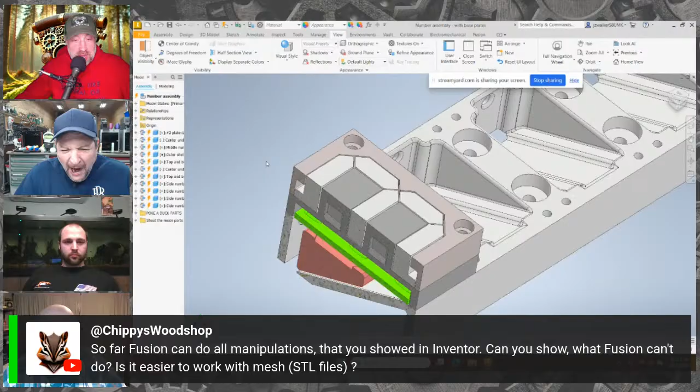I think the Autodesk suite of software has a bear of a time with any kind of mesh. I often have to take things into Blender and hack them up there, modifying a mesh file versus an actual project file for Fusion or another 3D CAD software.

I think it's not so much that Fusion can't do things, it's that Inventor is far more mature and can do things better and to a much greater depth than Fusion can. I mentioned earlier, parametric is based off setting parameters, and I think Jason showed that in Inventor: this equals this, and this is going to match this connection, and if this changes, that changes, and it's all tied together into this string of sequence. It gets longer and longer and longer.

Yeah, I mean, they're all tied together based on each other. Yeah, to that exact point. So I changed those couple parameters in my first model. It's carried all the way through to this assembly file, which now I can't move because I messed something up there. So every single thing is tied together, and every single decision you make with a dimension affects every other dimension in this software.

It's not like Tinkercad where you can just put the shapes together. It's much more user... it's unfriendly for the user. It has a much bigger learning curve. It does.

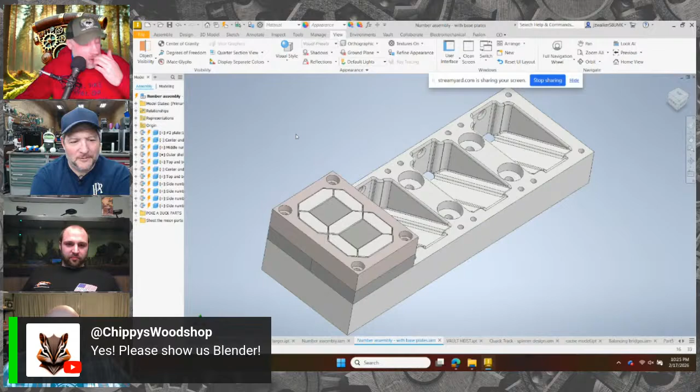I think we got a request to show Blender on here, so that's probably another night. We'll need to find someone else for that — I'm a caveman with Blender. Yeah, I don't know anything about Blender myself.

It's great for mesh work. I always say if you want to do something engineering-wise, stick with the Autodesk softwares. If you want to be creative, go to Blender. They're completely different beasts. These are parametric, while Blender is what's called a direct modeler, where you start with a shape and mold it like clay, finessing it to get fine detail.